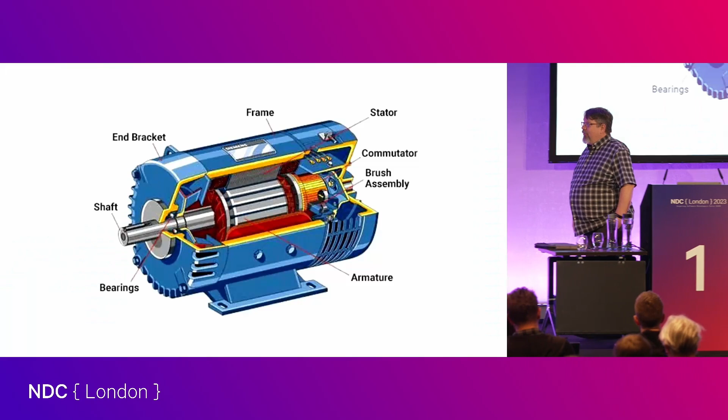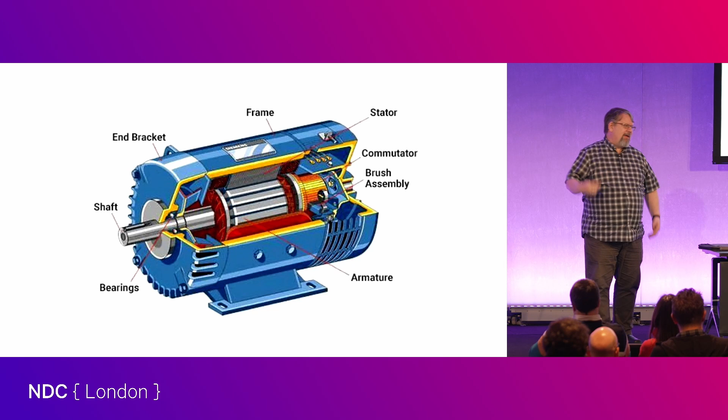The key to the whole thing is the generator. This is the technology - the one that won out was Tesla's design. For the most part it's been improved somewhat; there are a few different variations on it. But in the end, we have a shaft that's being spun by some other source to turn an armature inside a set of coils. From that magnetic effect, we get a set of waveforms.

Typical out of a commercial generator is a 3-phase waveform of electricity. I find it more common in the UK that homes actually have 3-phase power in it - not all of them. It's very unusual in North America to have 3-phase power into the house; they're usually only for commercial sites.

We have what we call 2-leg power, which is even stranger - they're 180 degrees out of phase. Many places have a single leg, where they only take one. We can talk about 240 volts versus 120 volts, 50 hertz versus 60 hertz, but it's really not that important.

I know you're really proud of your plug. The rest of us aren't, okay? But that's okay, the plug is fine. The English plug is like Lego - it's the only thing you really fear stepping on.

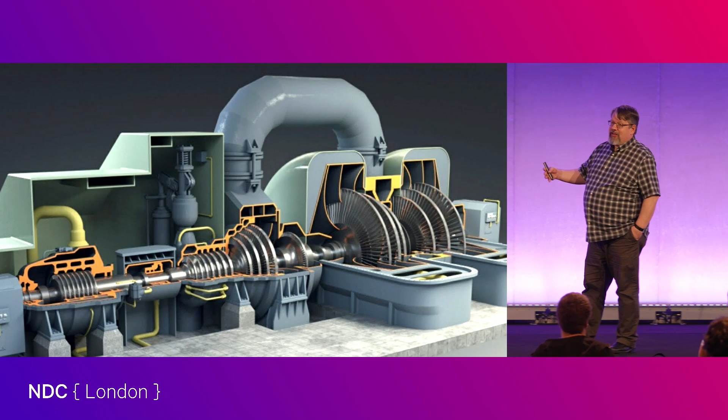It's bad news. The primary way that we spin those generators is the steam turbine, so there are a variety of ways to make steam. It has to be high pressure steam, very high temperature. We typically think of steam from the kettle, about 100 degrees Celsius, but the typical steam that comes into a turbine like this is about 300 degrees, so we have to do some tricks to get it that hot. This is a 3-stage, almost 4-stage style turbine.

So here's actually the high pressure stage - that's where the hottest steam comes in first, and that spins that part of the shaft. Then the pressure is reduced because it's gone through the turbine blade, so it goes to what's called the 2nd stage area, and then this is the 3rd stage, or the lowest pressure. This is a very refined piece of technology - we have built these for a long time.

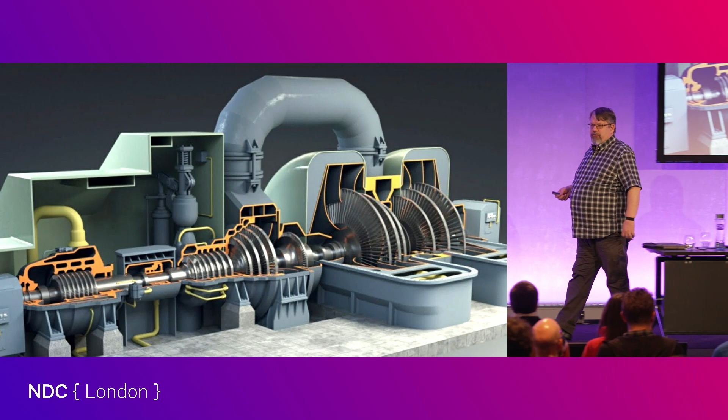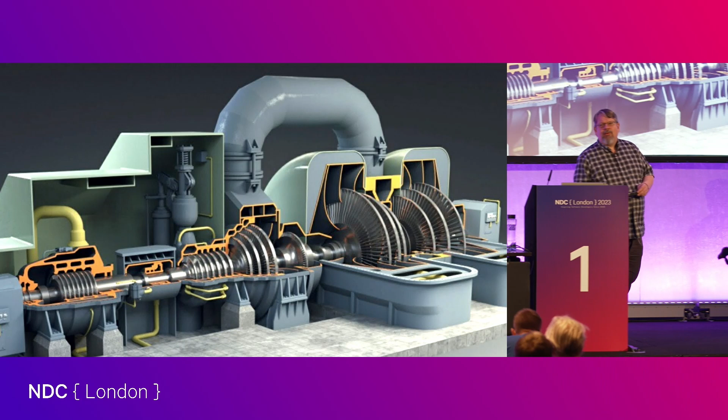We've built a lot of them. And it's why we tend to make power using water steam, because we're good at extracting as much energy from it as possible. And when we get into the conversation about making energy in general, in some ways this does hold us back. A lot of the technologies I'm going to talk about come down to this because it's known, reliable. The main thing everybody looks for in electricity is that it works, right? We're very unhappy when it doesn't.

And so now, as we're getting into the world as it stands today, we have a little more energy around that we need to innovate.

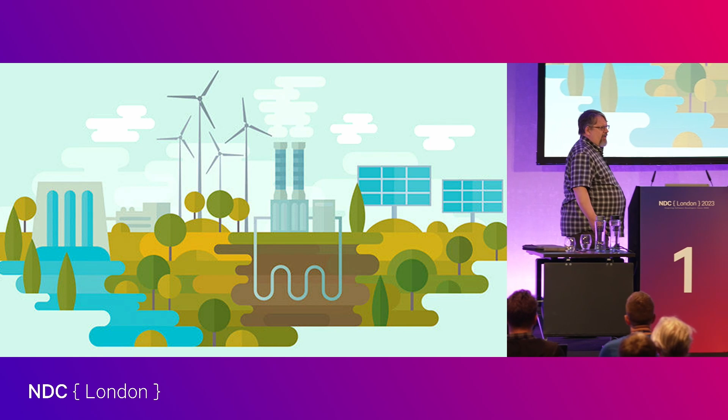Now, I'm going to talk about a lot of different energy types, and so it's good to have some common measure between them. The usual one in the industry is called the levelized cost of energy. It basically says how much does it cost to build the plant, how much does it cost to operate and maintain the plant and ultimately dismantle it over the amount of time, versus the amount of electricity that it will generate. That gives us a number, typically dollars per megawatt-hour.

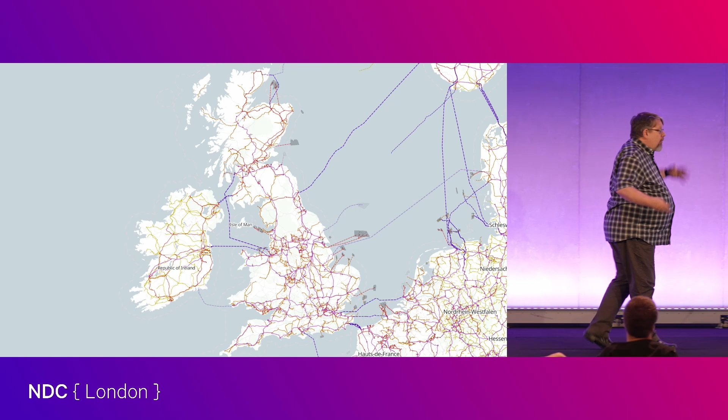No grid stands alone, except Texas. That's why theirs doesn't work that well, right? You make more than enough energy in the UK to supply all of your homes, but you also export a fair bit of it and import a fair bit, which I know seems odd, but the reality is that energy is an arbitrage business. Sometimes it costs more to make electricity and cheaper to buy, and sometimes it's smarter to sell and then buy some back. So as much as you may no longer be a part of the EU, you still transit a lot of electricity backwards and forwards with a bunch of different nations. That's what a civilization looks like if you're going to have it work well, and you still do it.

And those weird lines that just sort of stop in the middle of the channel are wind power plants. So you have to run a wire out to them to bring the electricity back on land.

All right, let's go through some of the sources and how the UK uses them, and we're going to start with coal for a very good reason: you guys started this. Now, to be clear, coal was discovered a long time ago. There is evidence of coal being burned back in prehistory. It was the rock that burns. But it was that guy, James Watt, burning coal to make steam, initially to pump out mines to manage water, back in the 1700s, that really kicked off the industrial revolution as we know it. We're at the center of all that.

The first coal-based electrical generation power plant was the Holborn Viaduct Station, which is about a half-hour walk from here. It was built by the American Thomas Edison, and it was a DC power plant for lighting streetlights, because at that time, you lit your streetlights with coal gas and caused fires accordingly.

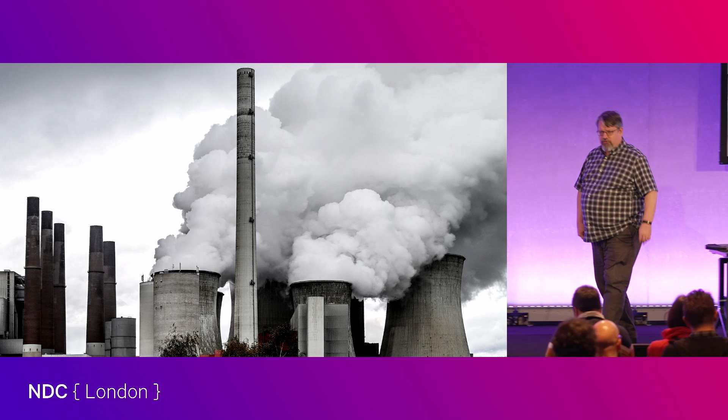Once upon a time, we also burned oil. Then we decided that was dumb, better to put it into cars and distribute the burning all over the country. The few oil power plants that existed in the UK converted to natural gas long ago, although most have actually been decommissioned and replaced with far more efficient gas power plants. Today, the combined cycle natural gas turbine power plant is the most efficient power plant that does base load burning of a hydrocarbon.

Natural gas is relatively cheap and quite plentiful, despite what the Russians may have told you. It's common enough in extraction of various sources that often it is simply burned off at the mining point. But you can capture it into pipes. You can liquefy it if you must, but generally using it as gas is the best way to go.

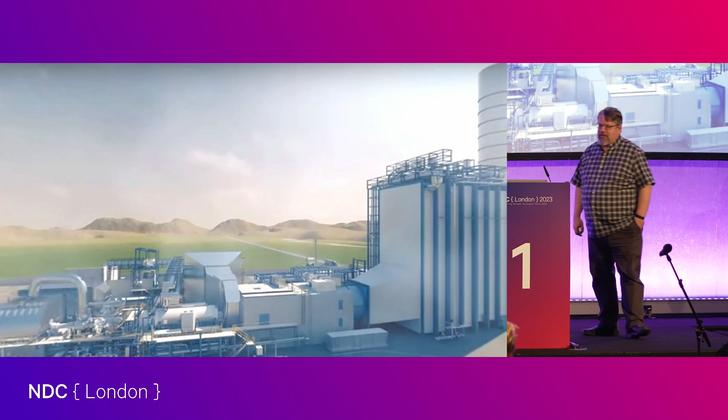The reason the combined cycle plant is so efficient - the big box on one side here is the air box, to make sure that the air it's bringing in to provide oxygen for combustion is clean and efficient. Here we have the turbine part. This is very much like a jet turbine. It's running on natural gas and it spins the generator.

But it also produces a tremendous amount of heat. So right beside this is a steam turbine. They use the excess heat to also generate steam and spin a turbine, which is why this gets to be so efficient. It utilizes that energy multiple times to extract as much electricity as possible. So not only does it create a fairly good amount of electricity for its size, it also produces the least amount of carbon emissions of a hydrocarbon-based power plant for the megawatts it produces.

And it's cheap, relatively speaking. These run about $45 to $75 per megawatt-hour LCOE. And they're fast. So often these plants are put in place as peaker plants. Part of the challenge of running a grid is you have to make as much electricity as needs to be consumed at the time - storing it is extremely difficult and a relatively new invention.

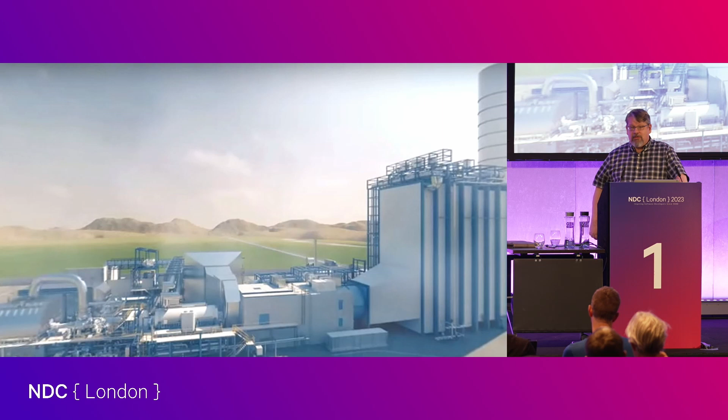So normally the folks that operate those power plants are literally spinning them up and turning them down based on utilization. And of course, the UK is famous for certain television shows that, when they end, everybody puts the kettle on. There's literally people waiting to turn on power plants to deal with the end of Coronation Street.

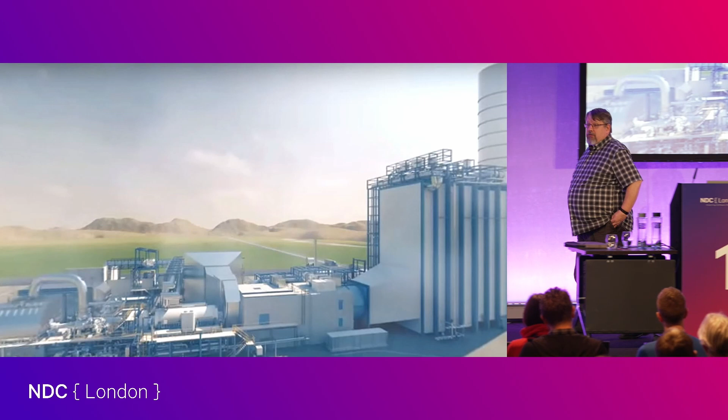More than a third of power generation in the UK today is now natural gas, some converted plants and some newly built plants. Natural gas is inexpensive. It does still have significant carbon emissions, so there are goals to move away from this. But if you're going to produce carbon dioxide from power, this is the least offensive way, and hopefully you'll get away from it entirely.

The United Kingdom has some of the very first nuclear power plants in the world. You also had one of the very first nuclear accidents in the world.

Going back to the 1950s, I did a whole geek out on nuclear accidents, and I never mentioned the Windscale fire from '57, and I got a lot of nastygrams about that because most people think about Chernobyl, Fukushima, and 3 Mile Island. Arguably Windscale was worse than all of them except Chernobyl. Only Chernobyl blew a core across the countryside, but Windscale burned for 3 days, and that's really, really bad. It was also way at the beginning of nuclear power, and largely people didn't understand how serious the situation was. And those that did really didn't want to talk about it. So the situation was made far worse by the way that it was treated.

That being said, nuclear power has matured dramatically. The power mix, at its peak, the UK made about 26% of its power with nuclear. Today it is 16%, and it will go down before it will go up. There are only 5 major power plants still running, 4 of them are slated for shutdown in the next couple of years. Some have gotten extensions, like Sizewell.

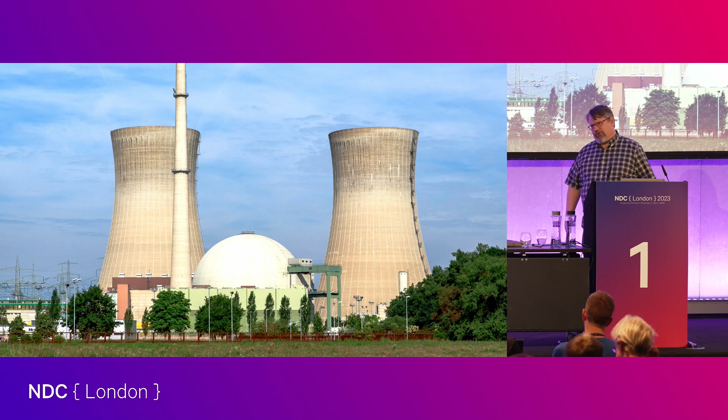I bring that up because as we talk about more modern approaches to nuclear power, we've addressed a lot of that. Modern reactor designs are far safer than the older designs. We don't have the problems that caused situations like Chernobyl or Fukushima. Fukushima is only 2011, but the reactor design was much older. There were 3 of 4 reactors damaged in Fukushima. There were actually 2 others nobody ever talks about, reactor 5 and 6. They were running at the time of the earthquake, but they were a slightly more modern version of that same reactor with passive shutdown. So even though they also got hit by the tsunami and their generators were destroyed, it didn't matter, they cooled themselves down. The older designs needed powered cool down, and they failed. Today, no reactor is built requiring active cooling. They all have passive shutdown solutions, and so are all the new reactors being built.

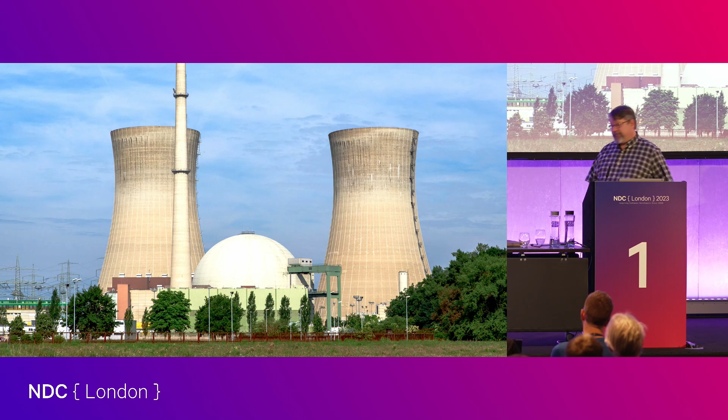I should talk briefly about biomass. It is a carbon-emitting power approach. Nobody builds biomass because they want to make electricity; what they have is excess materials available that can be made into power. These are power plants of opportunity, essentially. You'll find them around places manufacturing things with agro-waste products, like if you're refining sugar, you have an effluent that can be burned for electricity. They tend to be small, a megawatt or 2 at most.

The price, LCOE, can be pretty good, down to $50, up as high as $150. But again, you wouldn't do these at scale, so you have several hundred scattered across the countryside. Wherever there are materials that would otherwise be a waste product, they can be made into electricity. It doesn't amount to much in the overall power generation, and it produces less power than your coal power plants do, but it's a source of power based on us trying to be efficient.

Geothermal power is not something that you do in the UK. There's been a couple of experiments over the years, but for the most part it doesn't happen. And it's funny because it's not that far away - you've got Iceland, and that's all they seem to be doing these days.

The reality, of course, is as you dig down into the ground, you hit hot rocks. And if you dig far enough, you hit really hot rocks. If you send water down there, it will come back hot, and then you can spin turbines. The problem is that the drilling part is the expensive part, and your ground is notoriously hard and very difficult to drill into. So there's just not a lot of incentive to develop that here.

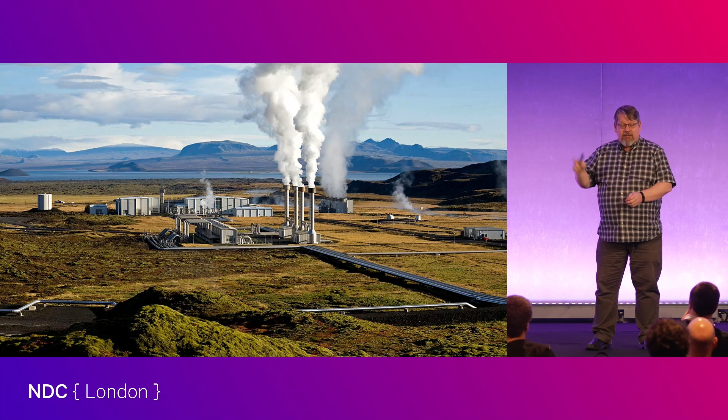Geothermal essentially has no emissions if you do it properly, which means having a closed loop heat system where you're pumping water down in sealed pipes, and it's coming back up another pipe as steam, then you heat exchange against it to actually spin your turbine and send that same water back down again. You'd almost have no emissions of any kind, and you don't really need other sources of water. It becomes a really interesting solution, so we may see more of this in the future.

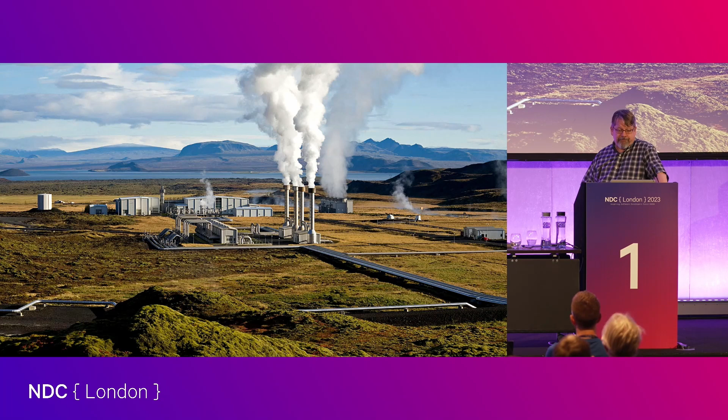Diesel electric power - if you have an urge to spend a lot of money on electricity, this is the way to go. You're literally talking about making a giant diesel engine, giant as in the fuel tank will be underground, the oil tank will be underground. You'll have a series of motors connected to those loops, and you run them 24 hours a day to spin generators to generate electricity.

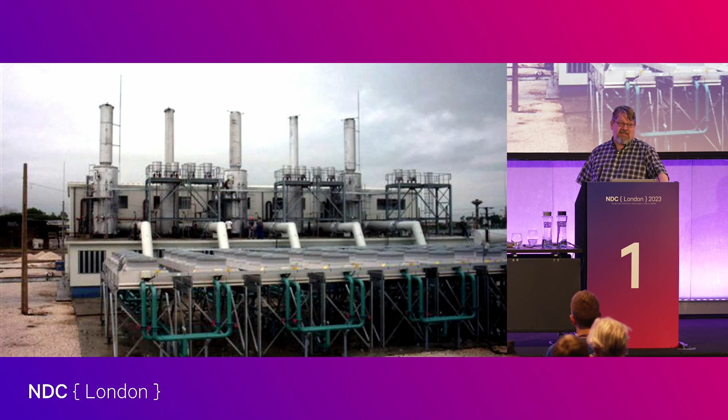But depending on your location, this may be the only choice. Look at places like the Galapagos Islands - it's technically not inhabitable by humans, but if you put in a power plant like this, typically no bigger than 5 to 10 megawatts, it's enough to sustain a small population of people with electricity. In the case of Galapagos, they use a bunch of it to desalinate drinking water from the ocean too. The UK doesn't use these - there's no reason to. It is very much the power of last resort.

Hydroelectric isn't a huge amount of power in the UK. I'm from British Columbia, where we've got mountains, so that's what we do there, and the Norwegians are in much the same situation. These tend to be very large projects, costly to develop, but they last an extremely long time. Typically, power plants are good for 20 to 40 years, sometimes 50 or 60, but hydro runs 100 plus with maintenance.

You can keep them going for a very long time. The price comes in at an LCOE of around $40 to $50. That's pretty effective. You do have some hydroelectric, but it's still only about 2% of your power.

All right, let's talk about the new stuff. Let's talk about onshore wind. The UK is an interesting mix of both onshore and offshore, sort of equal. Wind power is the growth area, and it's also currently the cheapest source of electricity available on the planet today, with an LCOE of around $25 to $50. $25 a megawatt is very, very inexpensive, and that certainly creates part of the appeal.

There's a reason for that. The amount of money spent developing wind energy is extensive, and today we have multi-megawatt offshore wind turbines. They are massive and incredibly reliable. That said, 20 years is typically the lifespan for a wind turbine — you'll change out blades and replace components over time. There are about 11,000 turbines in the UK these days, split evenly between onshore and offshore.

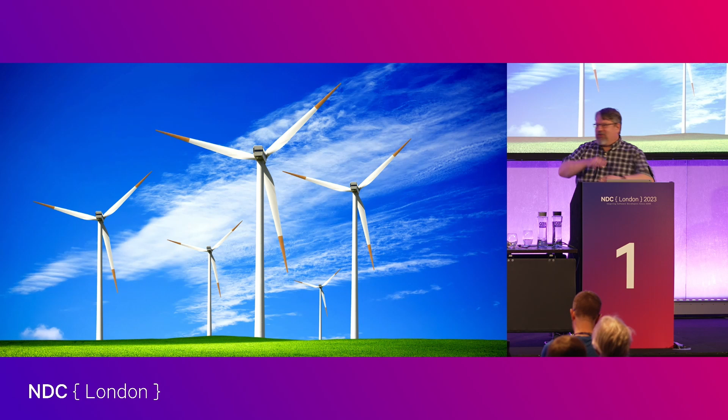As many as 500,000 birds are killed per year by wind turbines, compared to 2.5 billion birds killed by domesticated cats. So if you're really worried about the birds, keep your cat inside. Not that every cat kills birds, but there was a great study at the University of Georgia where they put cameras on domestic house cats that normally go outside. Only about 20% of them killed, but those ones were psychotic murderers — they killed constantly and clearly for fun. So if you've got one of those cats, you can make a big difference by keeping it inside.

So onshore wind is well known, kind of at its limits for what it can do, and there's only so much land to go around. Offshore is clearly more interesting, although there's really two classes of offshore.

These still have shorebird issues, and they are only viable in certain locations, so it limits where you can put them. They can only get so big, and they are hazards to shipping, so they try to keep them set in certain areas.

There is development going on in true offshore wind — this is wind with stabilized platforms, floating platforms with anchored cables, or a few different ways to stay them. This is directly derived from the oil rig industry. They're more expensive to make, but can be dramatically larger. Wind flows further offshore are more stable, and the bigger platforms allow them to get to better wind. All in all, this is probably the future of wind power.

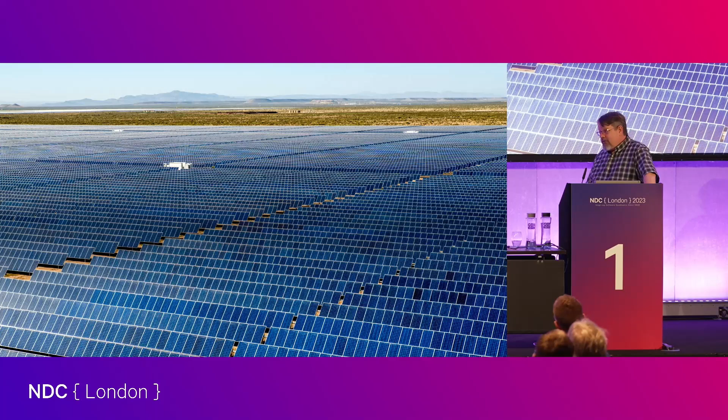Another downside: space consumption is substantial. It takes about 20 times more land to generate a gigawatt of power with solar panels than with a traditional power plant like a combined cycle gas turbine. On the other hand, lifespans are good, more than 20 years, no moving parts, no fuel, relatively little maintenance. They do need to be washed occasionally - don't let them get too dirty, and wiring does corrode. There's some maintenance to be done, but the maintenance costs are quite low.

The hotter solar panels get, the less time they last. They prefer about 25 degrees centigrade, so you'd think in the UK that's not a big deal, but I saw what you did last summer, and that can cost you 0.5% per year in terms of efficiency. So they do decay over time.

You don't tend to have very large solar plants in the UK. The biggest is about 75 megawatts, which is big, that's a lot of room, but there are gigantic ones in other places like Australia where they have lots of land. There's over 1,000 commercial solar power arrays in the UK now, and they're getting up to several percentage points of overall power generation.

Wind is by far the most popular, but solar's doing well. We're starting to get clever with our solar too, doing things like putting panels on the reservoirs of dams. One reason is that's open space, typically not particularly biologically sensitive. You made the reservoir in the first place, so you can mess with it. The water helps keep the panels cool, so they last longer, and covering the water keeps the reservoir fuller by reducing evaporation. In India, they're putting solar panels over their irrigation canals. It retains water, generates electricity, and decreases algal growth in the canals, so it's all mutually beneficial in exchange for a more complicated installation, often not in the perfect orientation, but with some advantages.

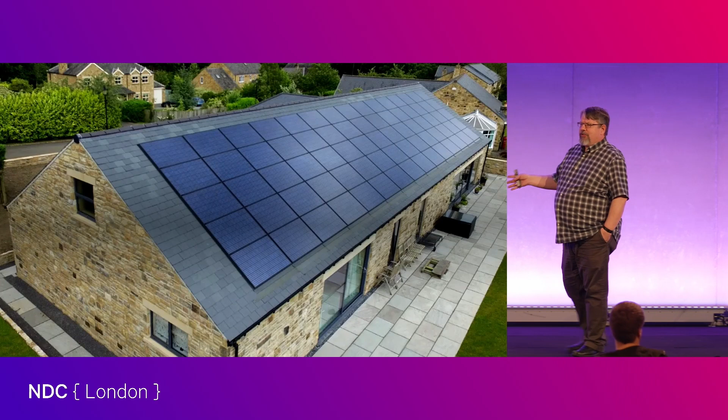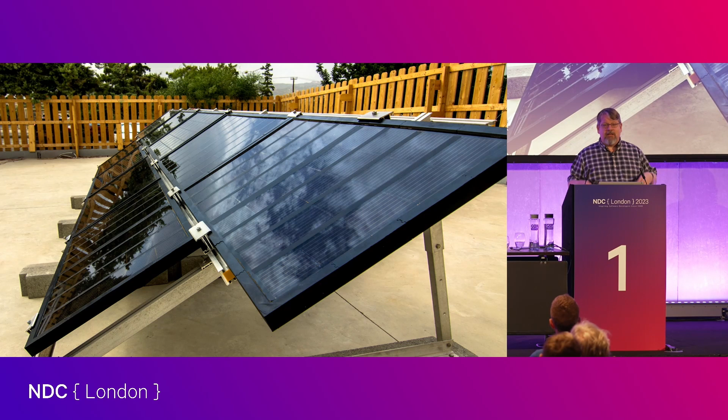There are more efficient solar panels out there. The main feature of these silicon solar panels is that they're relatively inexpensive and reliable. They're a very known entity - we know how long they last, how they break down, how to maintain them, and how to control them well. There's a popular technology being developed right now called perovskite solar. It's substantially more efficient, very thin, and can even be made transparent. It gets up to about 30% efficiency, and it's also a little less resource intensive - you don't need as much silica or titanium. However, they're a little pricey and have durability problems. They're very intolerant to excess heat, so there's a lot of maturation needed before they might be good enough for commercial grade. So if you're wondering why we're still using the 'crappy' solar panels, they told us there would be better ones - they're trying, but there's a lot of things that go into a workable power source.

Both with wind and solar, we have the problem of sometimes it's not windy, sometimes it's not sunny, and we need power storage. Power storage has come a long way in the past few years.

For better or worse, our buddy Elon. By the way, I miss old Elon - I miss the 'let's fly my sports car into space' Elon. That guy was cool. This guy's crazy.

He also helped mature the lithium-ion battery to the point where they're now doing grid-scale power using lithium-ion. Now, lithium-ion is not well suited for this task. Lithium-ion batteries focus mostly on rapid charging, relatively rapid discharging, and lightweight, all things that are good for a car, but not especially important for grid power.

We're making better lithium-ion batteries. We're starting to learn to optimize them for other roles. So the lithium iron phosphate batteries are a little better for this, but they're not optimal. There are better technologies out there.

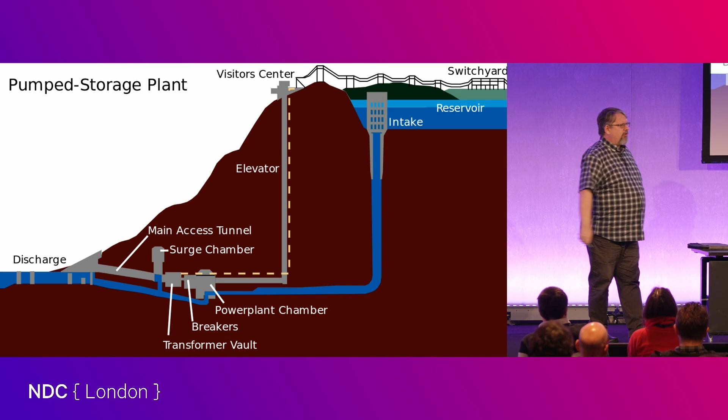Far more common when it comes to storing power is pumped storage. So this is the idea that while I have extra electricity hanging around, I use it to pump water uphill into a reservoir. And then when I need it, I let it come back downhill and spin turbines with it. There have been some dedicated storage sites.

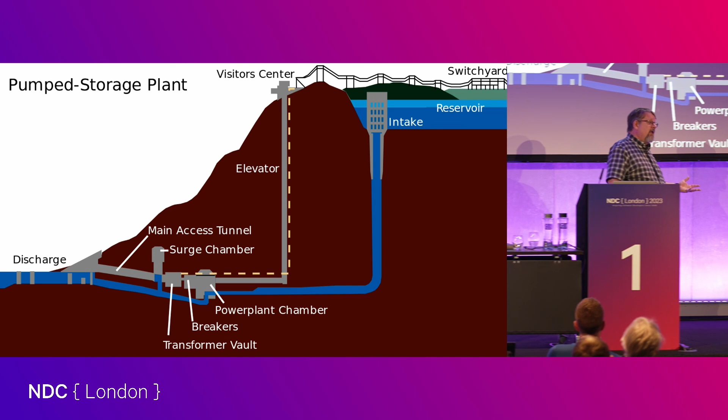This is literally a diagram from a site in the US called the Raccoon Mountain Storage Site. So it was never a dam. It was literally built for the purpose of being pumped storage. And so it helps us offset when we have more power than we need. We can pump water uphill, but it's also becoming more common today to add pump storage capabilities to existing hydroelectric dams, because we're finding more and more that our reservoirs aren't full all the time. The change in rain patterns and things have meant that our reservoirs are lower, and so we are able to pump water back uphill when we have excess power.

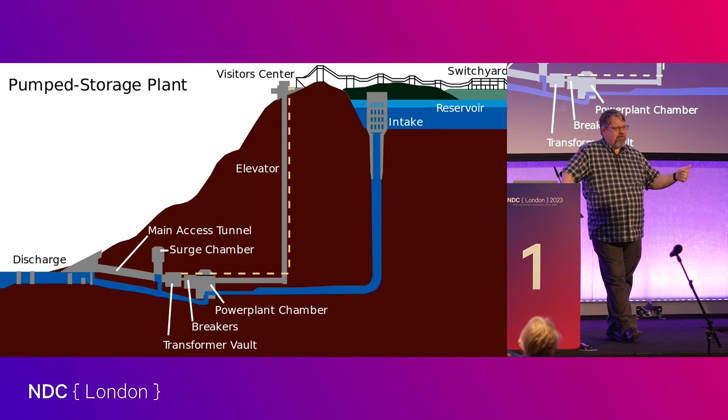Back to that idea of putting solar panels on my reservoir, one of the things I can do with those solar panels is pump water back up into the reservoir. So the reservoir gives me my on-demand power, and then when I have excess power, I'm using solar panels to recover it. I know it sounds weird. It's like, hey, you just let that water go down to make the electricity? Like, why would you pump it back up? Typically, I have reservoirs sitting below the dam as well, or I have other sources of water coming through the area, and so I can pick up that water and pump it uphill when I have power available for that.

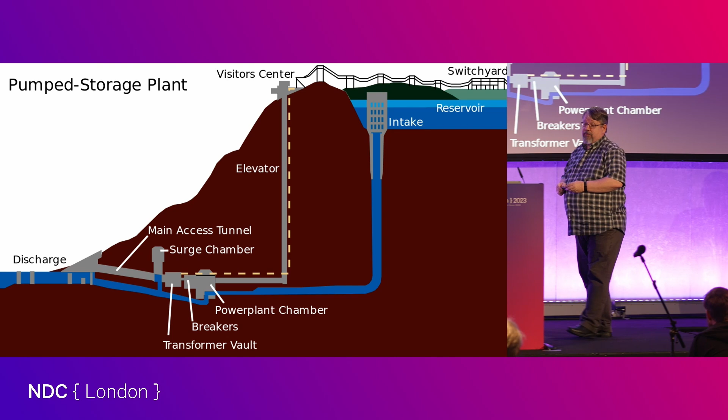So pump storage is the most common power storage system we actually have. They've been around a long time, but we're taking them more and more seriously.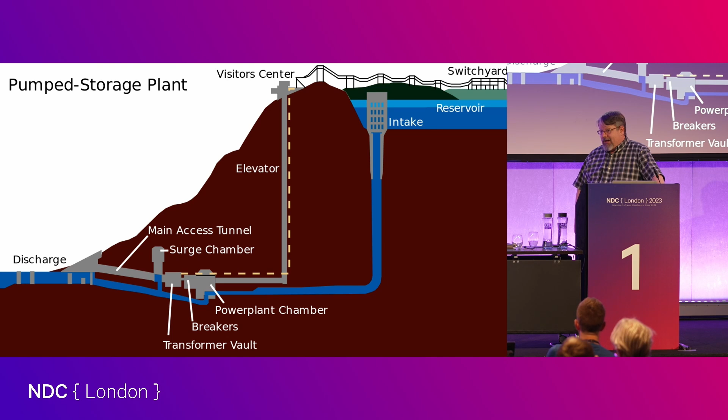The current estimate between pump storage and some of the battery systems coming online right now is that the UK is capable of storing up to about 1% of the power that it consumes in a given day. That's still a lot of megawatts, but it also speaks to how much further there is to go.

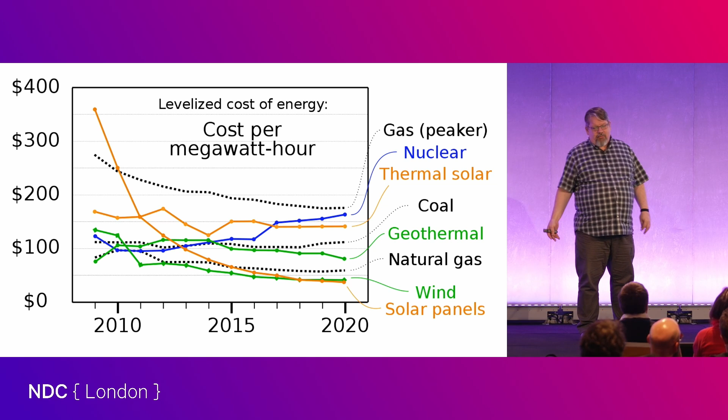So I've run down the different power solutions, and this is where we are in society, where some power sources have gotten less expensive, some have gotten more expensive. Interesting that the zero emission ones are becoming the cheapest, wind and solar. Natural gas is the next cheapest - still a petrochemical-based power source, but relatively inexpensive. Nuclear tends to be absurdly expensive. Coal has gotten more expensive over time. And gas peaker plants are costly, but they're different from regular natural gas plants because they're fast on, fast off.

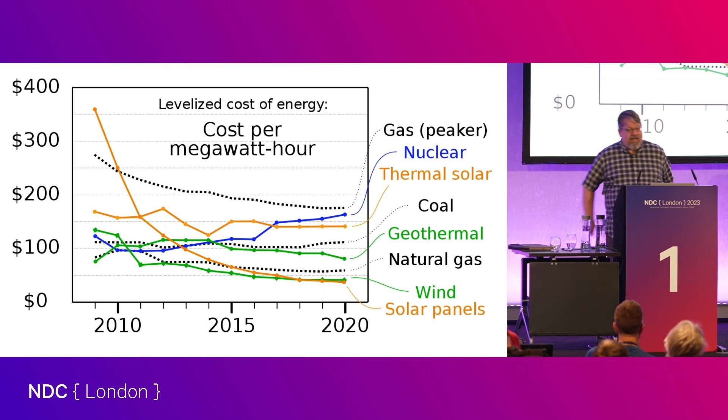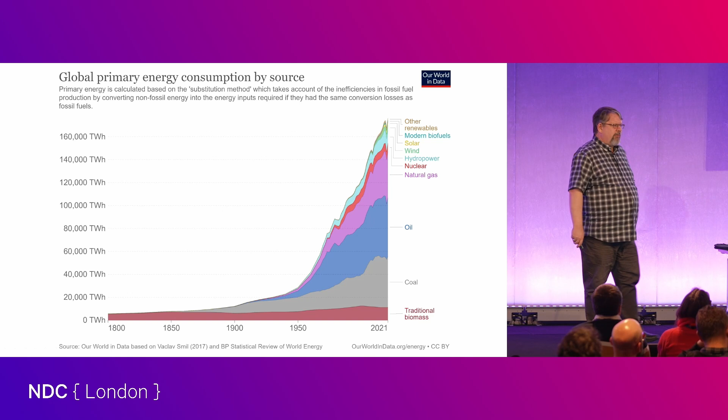And looking at the planet as a whole, we're a long way away from getting to full renewables. If you look at this graph, it's not going to make you happy. Down at the bottom, that traditional biomass, that's burning wood - would not recommend. But coal, oil, natural gas make up the vast majority of all the terawatt hours made on this planet. Then up in this cluster right at the top is our various renewables, whether it's solar, wind, hydro. Nuclear is not technically renewable, but at least it's zero emission power.

Let's talk about hydrogen, not because the news is good. There's three kinds of hydrogen, essentially, the way we've defined it. There's gray hydrogen, which is really taking natural gas and steam reforming it so that we blow off the carbon dioxide from it and keep the hydrogen. So yeah, I'm using hydrogen, I just had to emit a whole lot of carbon dioxide to have it. It's also the cheapest way to do it. There's blue hydrogen, where we're still typically taking natural gas and blowing the carbon dioxide off it, but we're capturing the carbon dioxide. And then green hydrogen, the one everybody wants to talk about, which is where we use electricity to split water to create hydrogen and release oxygen as a waste product.

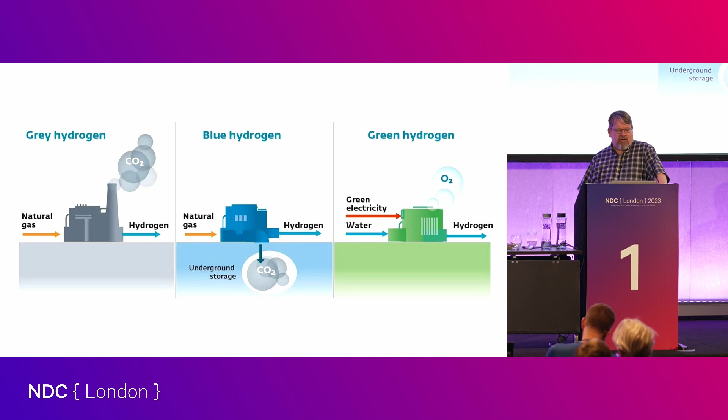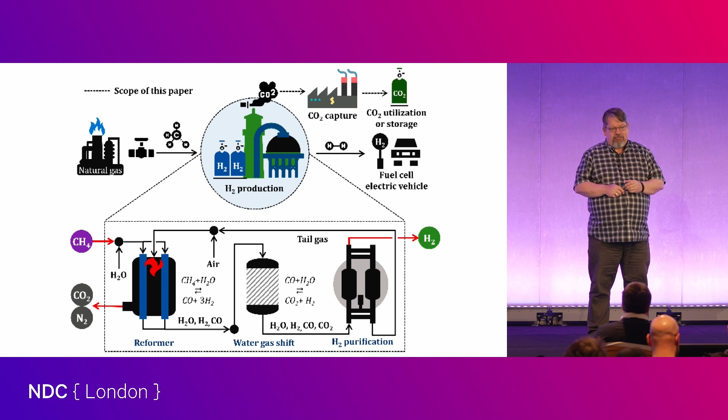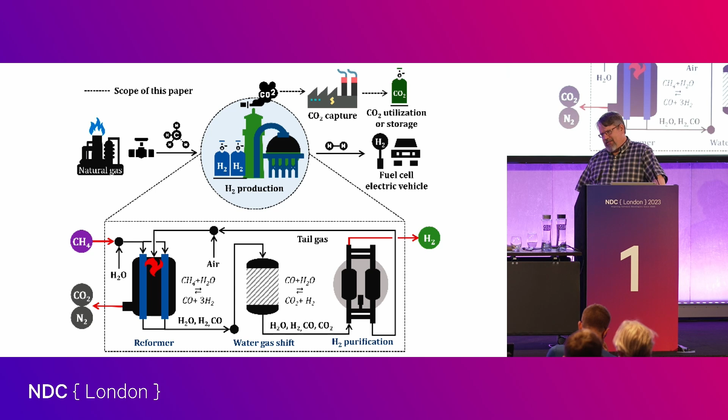So let's talk about the differences between them. The vast majority of hydrogen production today, whenever we've needed hydrogen, we've done steam reforming. So we pump in methane, our natural gas, and we burn it, get it up to very, very high temperatures. There's a bit of chemical reaction, and we're able to peel off the hydrogen that way. And we make a lot of carbon dioxide. There's a few different ways to try and capture that, and then you try to utilize that carbon dioxide - sometimes it shows up in Coca-Cola. It takes about 6 megawatt hours of electricity to produce a ton of hydrogen. Hydrogen is very low density, and you'll make about 10 tons of carbon dioxide in the process for those 6 megawatt hours of electricity.

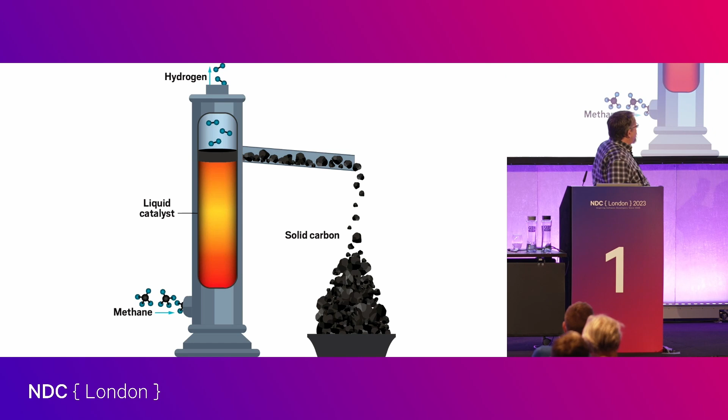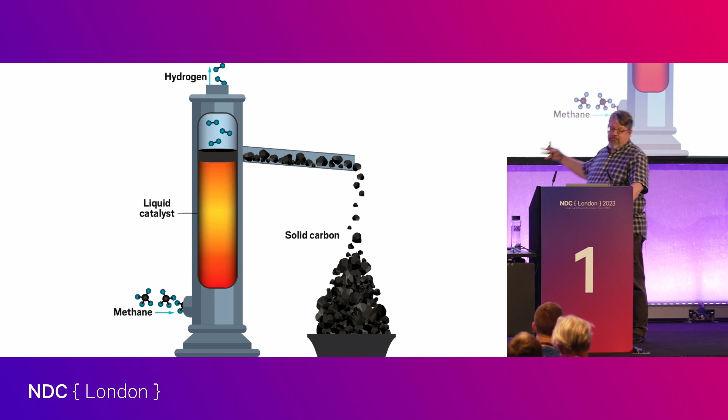And everybody's favorite, the green hydrogen, which is where we make hydrogen out of water. So what's the problem? Well, it was about 6 megawatt hours to make a ton of hydrogen in the gray approach - it's 40 for electrolysis. But yeah, you're going to split it in half, you're going to make 8 tons of oxygen for 1 ton of hydrogen. Hydrogen's very light, but oxygen's not a big deal. It's just not cost effective. It's incredibly expensive to make hydrogen this way. You need a lot of electricity to do it, and that's why there's just so little of it in the world. They figure less than 4% of hydrogen production on the planet is done through electrolysis because it's just a massive power sink. They're getting better at building systems like this that can use excess power.

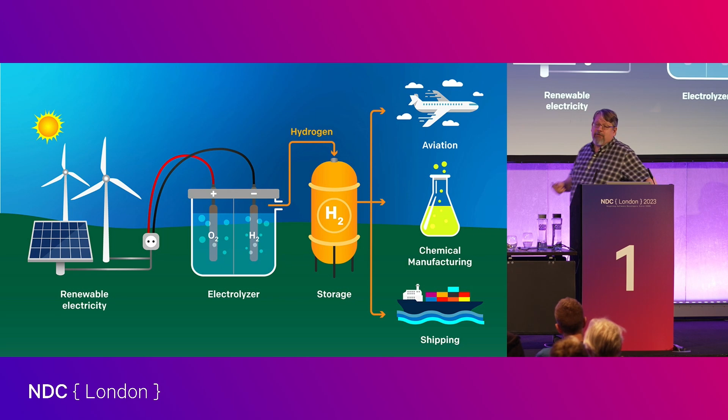Often we're making solar and wind when we don't need them, and it's a problem to manage that. So one of the options is you switch over to an electrolysis method, and you burn up that excess electricity by making hydrogen.

We've started to see combined cycle systems out on floating arrays of wind turbines where they have the electrolysis unit on site and they're storing hydrogen on site as well as making electricity. When there's excess electricity being produced, they can switch over and make hydrogen from it as well. It's clever. Long way to go.

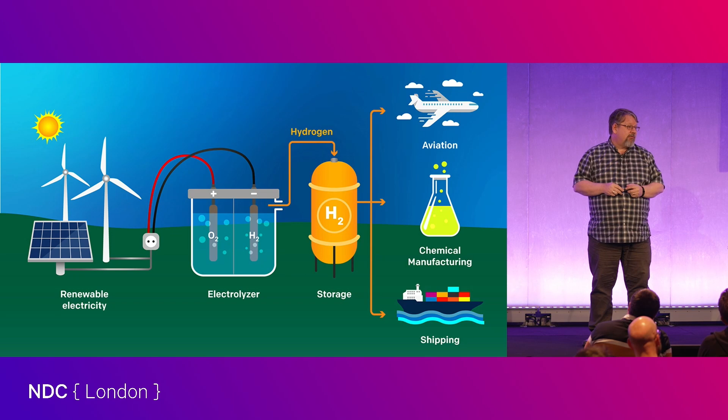Let's go back to nuclear, because I only talked about traditional nuclear and obviously the UK is doing some of that. But the hip new approach that's been talked about for years is small modular reactors. This has been a pipe dream for a long time, but 2022 was a good year, because that's when several different small modular projects got approved, and some even started construction.

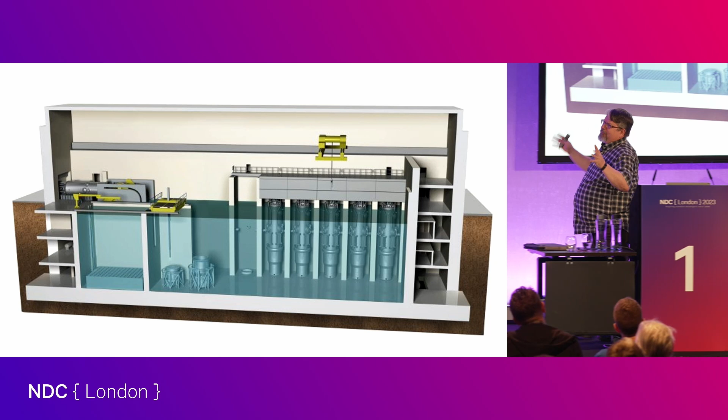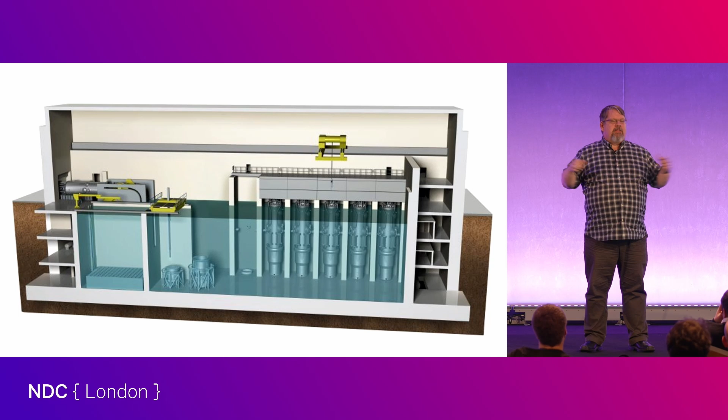The core concept, the most important thing to understand about small modular reactors, is that the site that runs the power plant never handles the radioactive material. The radioactive materials that go into these reactors are handled in a factory—one place certified to process, assemble, and handle the nuclear material. They put together a small modular reactor, the kind that can fit on the back of a truck. I know it seems weird to move that stuff around by truck, but if you're building nuclear power plants, you move reactor fuel around all the time.

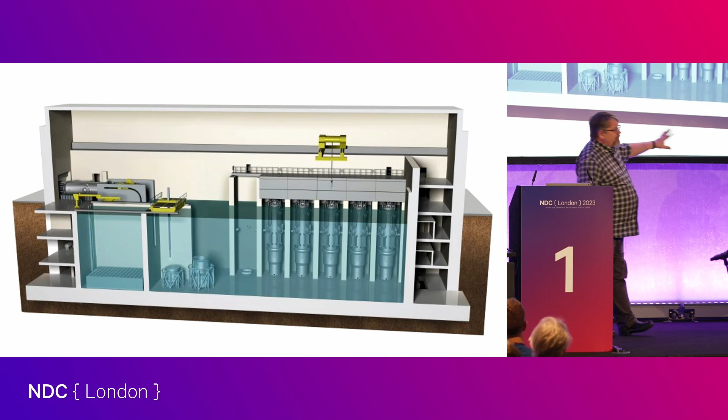They've made them small enough that the whole reactor fits on a truck, and a given site would have a bunch of reactors. They typically run for two years before they need refueling, so you stagger their implementation—you can take them out and reprocess them. They tend to be small enough that they can't actually melt down; they don't have enough fuel in them. So you never wreck the site. You can wreck the reactor, but then you take the reactor out and haul it away.

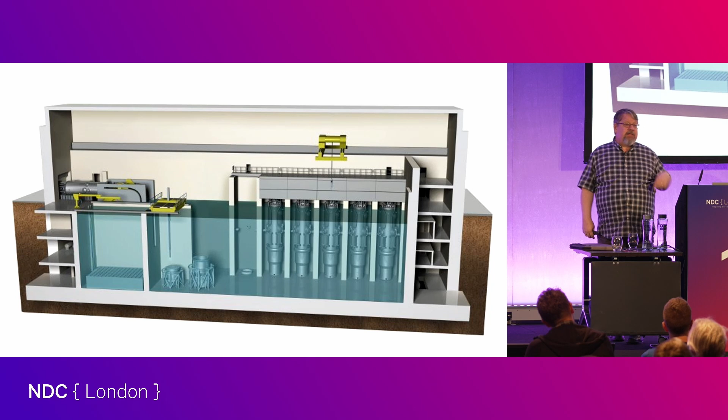There's a few things that come from doing it this way. You have one place certified for handling nuclear fuel, the factory. Sites don't need as much containment, they don't need the biggest perimeters, they don't have any fuel handling—they just take old reactors and replace them. It also means every couple of years you get to upgrade reactors. Rather than building these bespoke, massive concrete things distinct to one implementation of power, and after 30, 40, or 60 years figuring out what to do with it, or shutting it down mid-usage for modifications, every two years you get to put a new reactor in.

Most small modular designs are like this one from NuScale. This is now an approved design by the Americans—the Nuclear Regulatory Commission approved this reactor, so it can now be deployed. That being said, nobody's buying at this particular point, though there are several interested parties. These are only 60 megawatt reactors, relatively compact, which is why they fit so neatly the way they do.

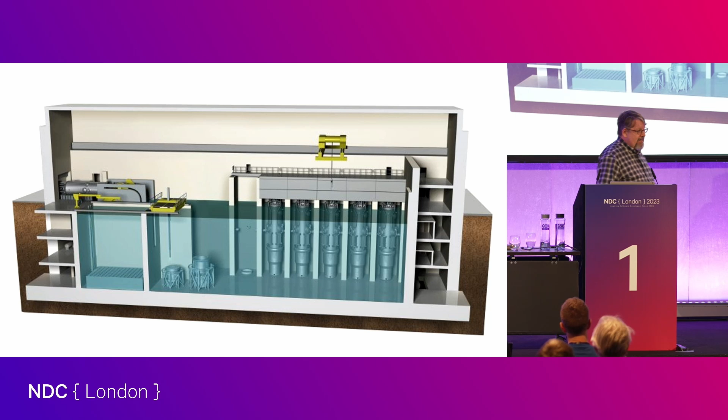In Canada, Ontario specifically, 80% of its power comes from nuclear, mostly the CANDU reactor, a particular design, but those designs are aging out. They just approved a location to put a small modular reactor design from GE Hitachi. It's not that small actually—it's a 300 megawatt reactor, so it's a pretty good size. But it's developed and constructed off-site and then put into place, and same thing, it'll run for a couple of years and then get replaced with a new one. The idea being that over time, we build a factory or two and keep improving reactor designs, rotating through different sites.

Where you're seeing 10 to 20-year construction times for reactor sites because of all the bespoke behavior and certification and so forth, they're talking about being able to build these in 48 months.

But they haven't done it yet. So I expect the Darlington site, which is in Ontario, which is underway, to go over time, because it's the first. But at least the methodology they're using gives us hope that we could do this quickly.

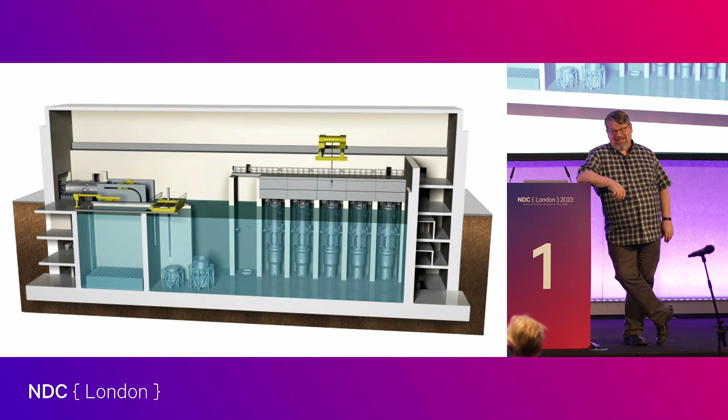What we like about these power technologies is no emissions, simple, reliable operations. We've now matured most of the big problems out of it. It doesn't need a lot of external support, doesn't need a constant supply of fuel coming in. You're talking about refueling every couple of years. So in Canada, where we have very northern areas where solar and wind are simply not feasible, these small reactor designs might be exactly what we need to support those folks up north. Because right now they're burning diesel, and that's not good for any of us.

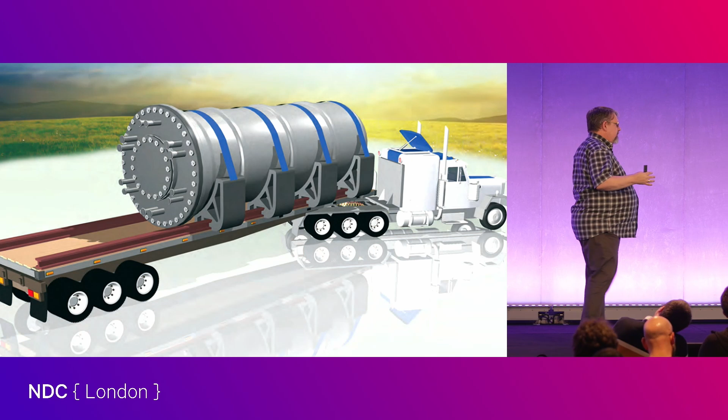The folks at Rolls-Royce have a design. They're very keen to get certified for about a 450 megawatt modular reactor that they want the UK to support, specific to here. So you may have seen it on the news, they were talking about it fairly recently. It looks very similar, it speaks to these same key issues: central location for manufacture, can be deployed to multiple sites, one location to certify, and then the actual reactor sites don't handle materials.

They didn't capture it, that's just what they measured. So it was a Q of 0.7, or 0.69 at the time. It was a big deal at the time. The reactor design is relatively old, it's from the 90s. ITER, the big upgrade for JET, is a much larger reactor, but they're also using superconductive magnetic coils. They use niobium tin cooled in liquid helium to compress the field, or at least they will someday.

They've been building it for a really long time. Because it's an international consortium, that torus, the donut that's being built there, is being built in 8 segments in 8 countries, because that's an efficient way to do things. But remember, this is one of the ways you get, this is the same reason they did this with the International Space Station: when you get multiple countries involved in these treaties and so forth, you're more likely to actually finish it. The Americans started out going on their own, they were going to build their own giant torus, and they cancelled that. The next administration came in, and it went away. So now they're participating in ITER.

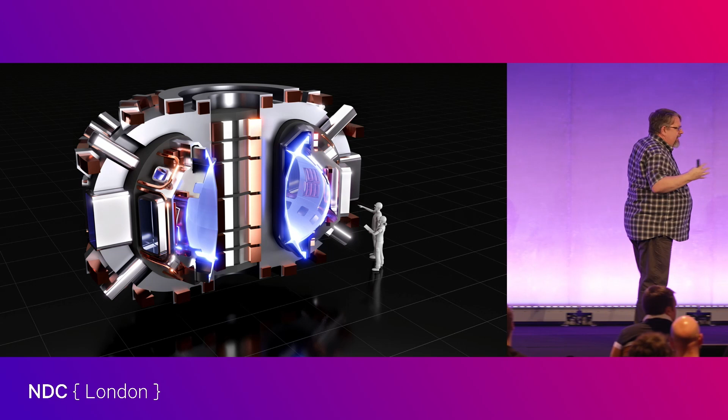Except that neutrons can't be contained by magnetic fields because they're neutrons. And so they actually do a lot of damage. The JET torus, when they did those big runs with it back in the day, it basically powdered the inside of the containment vessel, the neutron damage from it.

So if we were actually going to make a power plant like this, we have to understand that A, you need a ton of tritium. Tritium is not naturally occurring, you have to make it. So you have to actually run a machine that breaks lithium apart to spit out tritium. That's going to consume a bunch of energy. That makes you enough tritium to run your DT fusion, but you're going to routinely, now you have to capture neutrons in a useful way.

I would recommend a big wall of molten lead, which takes a lot of energy to run, but you're going to capture that neutron in there and generate more heat, and that should give you enough to spin some steam turbines. But it isn't going to be free. You keep talking about making power from seawater, so, except for the tritium.

We could do other kinds of fusion. There are kinds of fusion called aneutronic fusions. That's fusions that do not emit neutrons. And if you're interested in this stuff, I would go look at a company called Tri-Alpha Energy. They have a pulse reactor design that could get to the point, it doesn't yet, of doing proton-boron fusion, but it needs about a billion degrees as opposed to about the 100 million degrees needed for DT fusion.

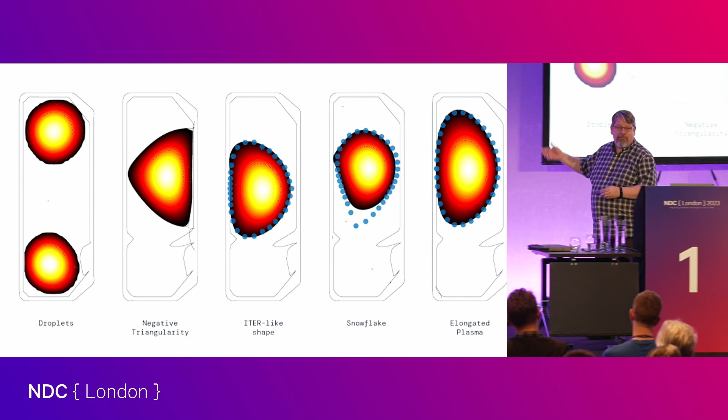I'd rather be building a lot more small modular reactors to make zero-emission energy and spend less on this if I have to trade the two. I prefer not to trade the two. I'd like us to do both. The fusion power has a whole lot of benefits for things like flying spacecraft long term, but it's a long way from being a power source still.

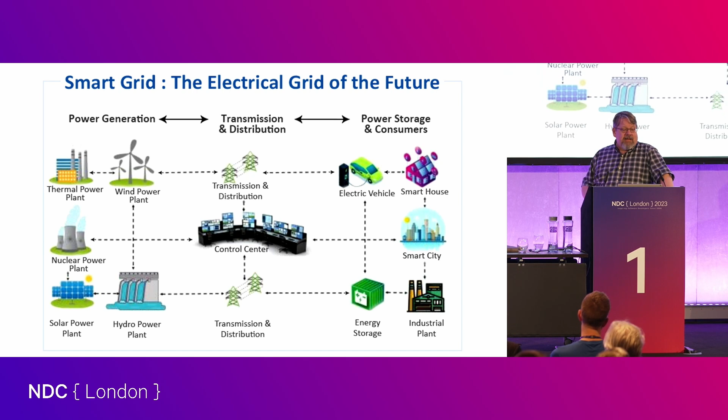We are getting smarter about our grids. So we're learning to make power in more places. That's been part of the problem with getting good at wind power and solar arrays and so forth, is we're used to having a few large power plants and making it pretty easy to keep the grid stable. Now we're having lots of different power plants, including power right at the house. So this is where we get into the whole conversation about residential solar, that our houses can be part of operating themselves.

The power companies don't want you to sell power back to them. It's not easy to use. In fact, it's largely impossible to use, but it's one of our incentives to do that. What they really like about you generating your own power is that you stop consuming theirs, at least at times. And so that offset mechanism is secondary.

What you're seeing now is that we're getting local battery solutions as well. These are the Tesla Powerwalls, and so they work very neatly with solar to offset the power. The reality for us is that our power consumption varies over the course of a day. Typically, the highest power consumption in a given day is around the time everybody gets home from work and kids are back and it's time to make dinner.

When you get home, you're probably going to run the hob, maybe the dishwasher, even do dishes. It's a huge spike in power consumption for an hour or so. And if you've got an electric car, you plugged it in when you came back. So you've made the worst case scenario, and the power company has to provision for all of that at once. That's when they turn on peaker plants and other nasty polluting things.

What if you could be using your batteries at that moment? The power you collected over the course of the day, with whatever little sunlight we got, gives us enough that we got maybe 14 kilowatt hours of electricity in these two power walls, and that should be enough to get you through dinner.

Better still will be to make our appliances smarter so that we don't do dishes immediately. We make sure they're clean by morning.

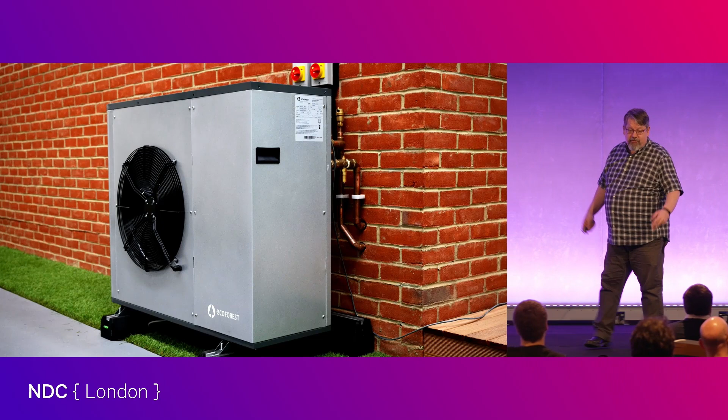We're getting pushed to use more and more electricity, actually. They're saying stop using gas for your heat, use a heat pump instead - more electricity. They're asking us to use induction stoves, which by the way are very cool, but also consume a lot of electricity. So we're going to increase our dependence on electricity to decrease our emissions, right down to the electric car as well. The electric car is an interesting option.

Because it's a pretty good battery, we are starting to see systems now where we can use that battery for our homes. It's not necessarily good for the battery though - it's designed to work the way a car works, with bursts of power and then charge later, where the way we consume power in a house is a little different from that.

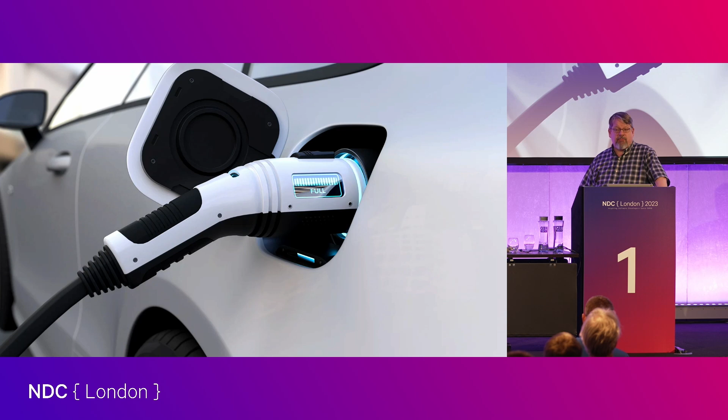But in general, for us as software people, the opportunity is to make the house smarter all around so that we can communicate with the power grid and have variable rate electricity. We're seeing some places now where the price of electricity varies hour to hour. So you can imagine with some good software, your appliances could tell your dishwasher, hey, make sure these dishes are clean by morning.

You loaded it at night, but you won't wash it till sometime in the middle of the night. Now you could figure that out - hey, maybe 4am is the right time. But better with a smart grid that it'll actually say, okay, I can run this off a battery. Or maybe the local wind turbine kicks up because it's windy right now, and that's basically free power, so I'll do it now. That ability to select and also to converse with the grid and offset, so the grid has an easier time dealing with these things.

I work with some folks in the Netherlands doing this with their electric cars, because the electric car demand around dinner time was so bad it was browning out the affluent neighborhoods - because they're the ones with the Teslas, right? And all you've got to do is brown out one affluent neighborhood, and boy, action gets taken.

And so now there's power points in that part of the world - when you plug it in, it negotiates with the grid for when to charge. It'll do an assessment like how much charge have you got, and can it get you to the hospital? If it can't, okay, I'm going to give you enough power to get to the nearest hospital, and then wait. Later in the night, I'm going to offset charging for all the cars in the homes in that area so that we don't stress the grid, and everybody gets a charge by morning.

We've got work to do as software people with all of these things. It's interesting times - they're going to make better and better power sources, but they're also asking us to use more and more electricity. So we're going to have to get smarter about it. And nobody wants to pay attention to this stuff - 12 cents a kilowatt hour, or even 20 cents, is not enough for you to pay attention, but our software could.